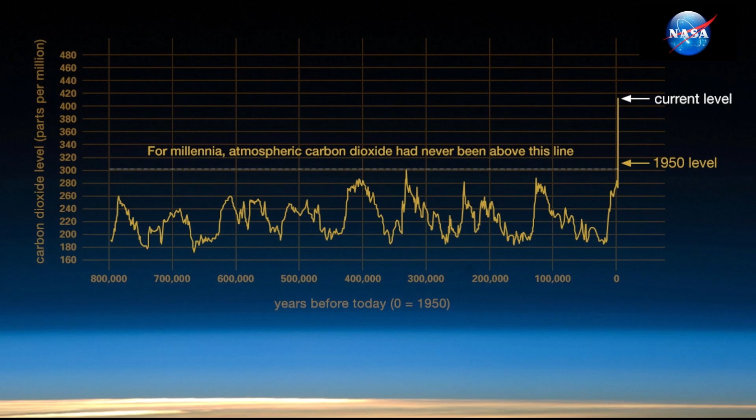So while debates on climate change continue, we saw what happened in the USA in the last weeks. So a lot of debates about climate change, but it is undeniable that CO2 levels in the atmosphere are rising. The oceans are acidifying, the biodiversity is decreasing. So this reality, because this is a reality, these are facts, imposes a responsibility toward future generations, reminding us that it is time to take charge of our energy future. So this is our mindset for the team at Enerprox.

So fossil fuels, although they have contributed to significant advancements, like increasing life expectancy, the gas is not the demon. So as we see, life expectancy, GDP per capita, infant mortality, economic growth, all this was driven by fossil fuel. It was not the demon. It allowed us to arrive where we are now. But if we look at the future, the transition must be done to a sustainable system because this is a finite resource. This is just the basic stuff.

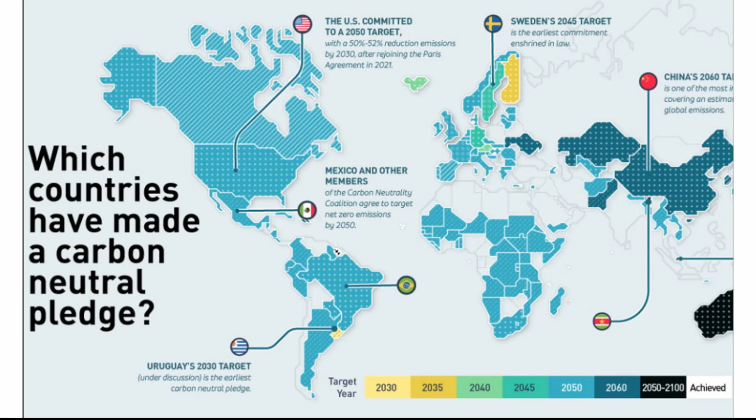One of the major encouragements is that leading nations, as USA and China and others, have set carbon neutrality goals. So not just reduce, but achieve carbon neutral goals for the coming decades. So this is a very big challenge to overcome for the next decades. And Canada too, by the way, before 2050, we aim to be carbon neutral.

So the amount of solar energy available on the Earth is about 10,000 times greater than our current energy needs. We have a lot of energy that hits the surface of the Earth each day. Moreover, renewable energies are becoming increasingly competitive compared to fossil fuels. So this is not only a game of environmental targets. This is more an economically driven transition that we have in front of us.

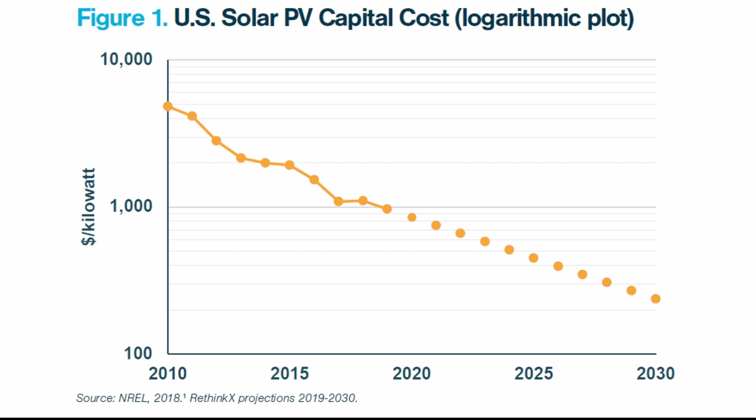So due to the dramatic drop of cost, in the business of solar, we have some key metrics. The cost declined 10 times in past decades. And obviously the main challenge is to have some phasing between the production and the need of the building. So this is intermittency. This is the big challenge to overcome in the solar business. The sun doesn't shine every time we need it and vice versa. So this is a big challenge.

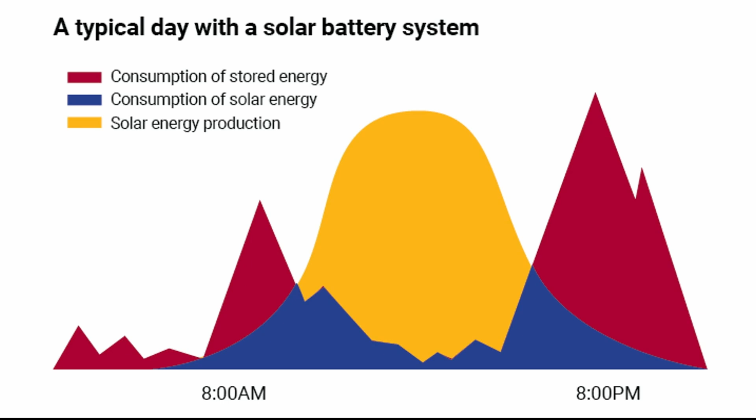But advances in energy storage, particularly with batteries, costs have also declined by a factor of 10. So this is a key metric, factor of 10 for the price. This has become a viable solution. It will become more and more viable to put some big batteries with solar to overcome the challenge of intermittency.

Yeah, so an emerging concept is that the cost of solar will be cheaper and cheaper, and one day we will have the notion of superpower. So we will have a pack of batteries, and we will have a very large solar installation. Sometimes in the day, we will have too much energy because we will over-design the solar part, because it is so cheap that we will put a lot of solar panels. So at some times of the day, we'll have too much energy.

So maybe in the future, depending on the day, we'll have very, very low price energy, even maybe negative price, because we'll have to discharge that energy on the grid. So it will be something that will change the future of energy. In the past, we used to have an upward curve for the price of energy. We bet that in the future, one day, that trend will just go down because the price continues to go down on solar and batteries.

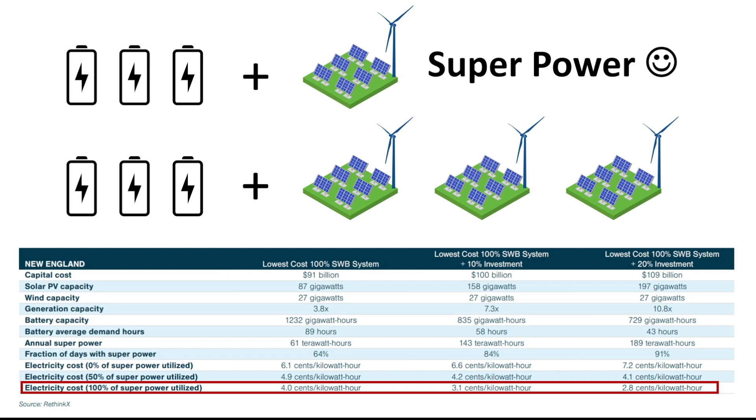So the concept of superpower is very, very important. In Quebec, we are fortunate to have extensive hydroelectric infrastructure. With Hydro-Québec, this is kind of a monopoly, just one business that distributes the hydroelectricity here. So we are fortunate to have 40,000 megawatts of hydroelectricity installed here in Quebec.

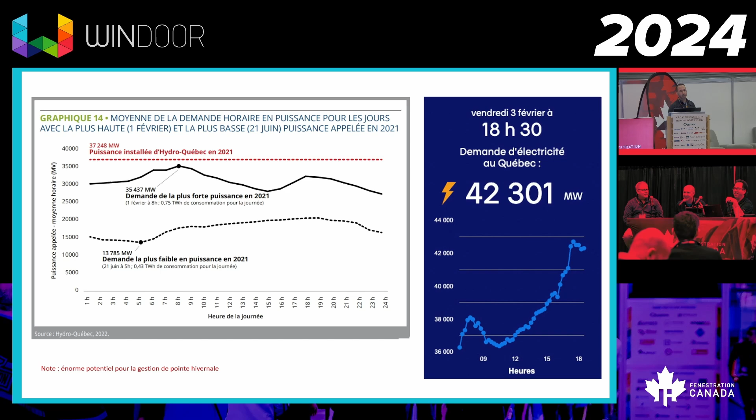And even with all that, we see here a 40,000 peak in February; we got over 40,000. That is a very, very big energy need. So even though we have that kind of power here, hydroelectricity, we still consume about 50% of our energy as fossil fuel. So we will need to transition that gas to electricity.

We need to electrify everything in the future. So we need to think about not just buildings, but also cars, and all the stuff will need to be electric in the future. So this is very big infrastructure that we'll need to build.

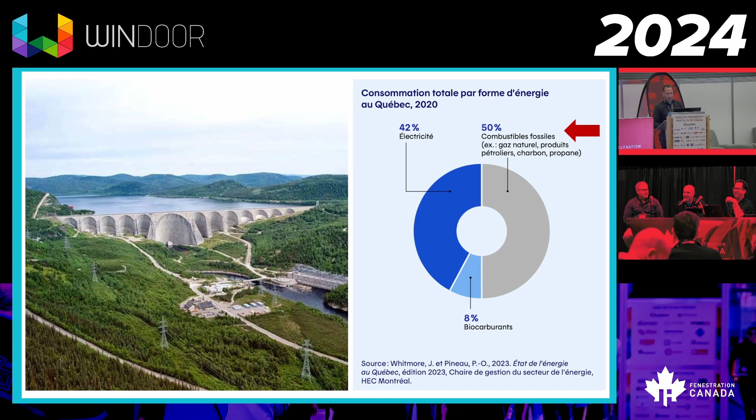So to support the province's decarbonization plan, Hydro-Québec is planning over $185 billion of investment in the electrical infrastructure from here to 2035. This is a very big investment: electrify everything, more energy production, and also energy efficiency. So you guys are in that kind of business. Do energy efficiency. It's important to produce, but also reduce. Both. We need to do both in parallel.

By the way, after 2035, we don't stop there. It will be necessary to double the electricity production again. So after 2035, even though we will have invested that 185 billion, we need to invest more to achieve carbon neutrality. And this is Quebec, but this is the reality in China, the USA, all over the world. It will be very, very expensive to transition, but we need to do it.

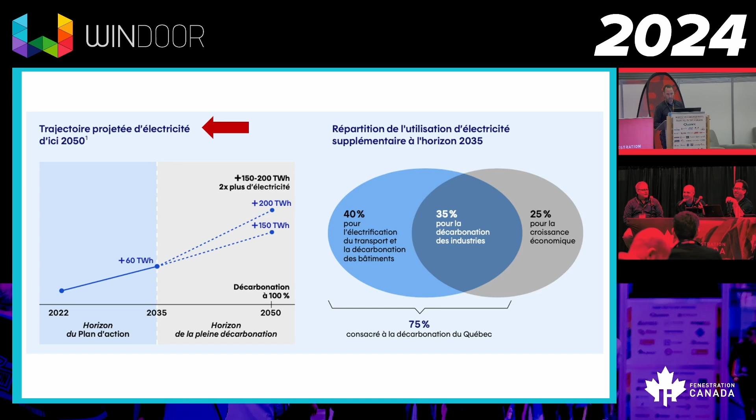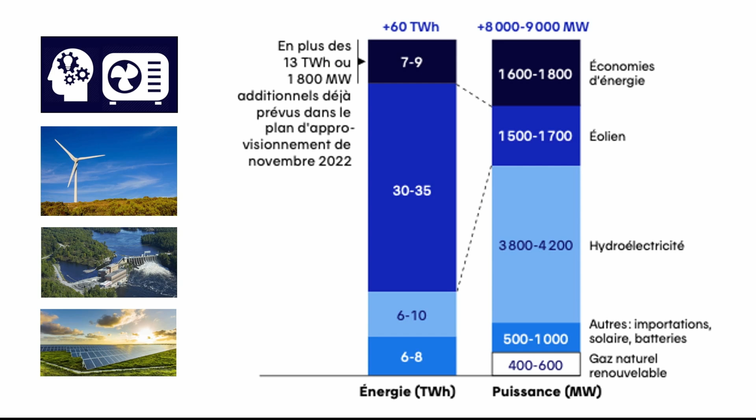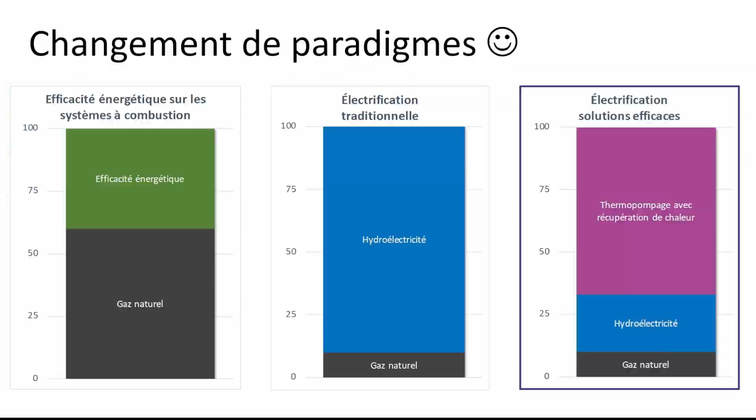Because for the electricity sector infrastructure, what is very hard is to deliver the peak power 100% of the time of the year. It is not economically viable to deliver that kind of peak. So Hydro-Québec did a partnership with Énergir, for the distribution of natural gas. They have a deal that Énergir needs to keep the natural gas going because Hydro-Québec needs the peak shaving a few times during the year. It would be too expensive to do it with hydroelectricity. So this is a kind of paradigm that we need to shift.

So that was just the introduction. I don't know, guys, you are from all over Canada?

Yeah. So an introduction for Quebec is good to have an idea, but it will be the same thing that we will need to do all around Canada, but with different prices and tariffs. I talked to a colleague just before about the differences depending on the province. The energy price is very, very different depending on where we are.

So at Enerprox, we specialize in energy management. First, we have advanced technology software to do it. We integrate algorithms. We integrate heat pumps with heat recovery, solar energy, and also energy storage solutions. Our vision is to transform buildings into decentralized ones. This is another key aspect to focus on. In the past, we installed big infrastructure. In the future, we think it will be more decentralized. So we need to think of each building as a kind of power plant, but decentralized. Microgrids will be usual in the future.

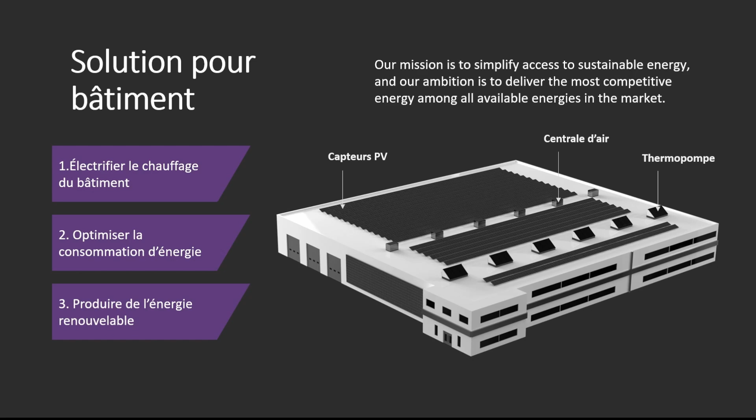So since we do energy efficiency, heat pumps, we will put some solar panels to have more energy. So this is the kind of project that we have. An example of a real project. This is just in front of our siège social, in English, head office, in Victoriaville. So this is about 40,000 square feet.

This is a kind of innovative building with good insulation for the envelope, heat pumps, solar on the facade. So at Enerprox, we appreciate putting solar panels on the facade of the building because we can match the production with the need during the winter. This is very good for us. So this is the kind of building, small building, decentralized power plant that will be installed on the roof.

So our engineers, by the way, use eQuest as an energy modeling software tool. It was originally developed under the auspices of the U.S. Department of Energy. This is a free software, by the way. Any engineer can use that kind of software. This is very precise, empirical data in that kind of software.

So the energy analysis for architects, for energy consultants, but also for manufacturers, we can use that kind of model. And what that kind of model tells us from a data standpoint is that wall, roof, infiltration, and ventilation, yeah, this is very big energy consumption. You see the colors, the big chunk is ventilation, and the other colors are wall, roof, and infiltration.

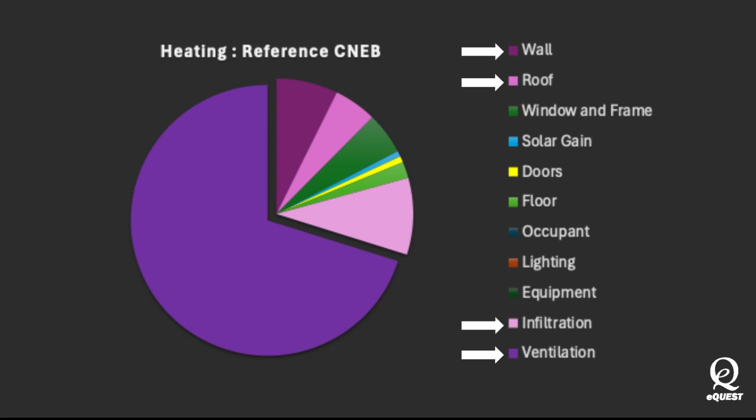So if we work on that kind of energy consumption for the building, for the heating, this is the target that we need to put our focus on. So this is eQuest that will produce that kind of pie chart. And for the cooling, this is also true. We'll consume much less energy in cooling, but we need to address the cooling also. With windows and stuff like that, you have all good products to avoid the sun overheating the building. So we need to have it in mind. But the chunk, wall, roof, infiltration, ventilation, is the main target that we need to address.

That kind of model, by the way, we can do iterations. So when we do a project, we can do 10, 15, 20 iterations, and we can compare with insulation, more heat pumps, less heat pumps, change window, change the wall, the floor. So we can work with architects to bring some data, some science to say, okay, if you change that kind of material, what will be the impact on the energy bill, the durability and stuff like that. This is very, very useful as a tool.

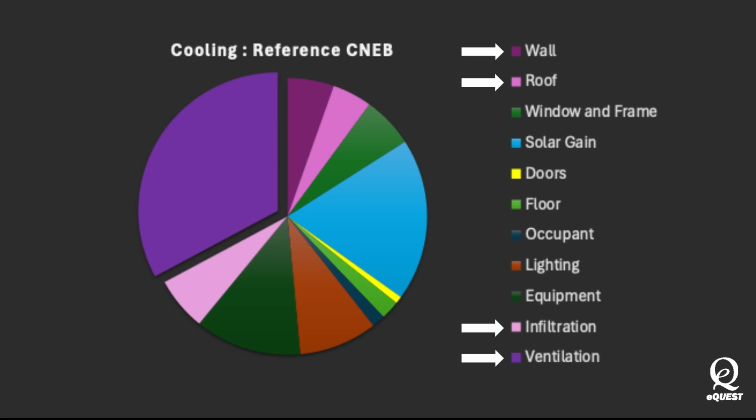So for the heat pumps, Terry, you named it. So we talked about the heat pumps. By the way, one thing that, I will say it in a very authentic way: the kind of scam that we see in the market, because we have subsidies sometimes. The price of the heat pumps and maybe other products will be very high compared to without subsidies. So this is a big challenge to overcome too. This is the kind of business that will drive the cost higher if we have subsidies.

At Enerprox, same price before or after subsidies. What we want is volume. We don't want the niche market. We need to have a very mass market. If we want to do mass market, we need to have a good payback and very low cost. So this is a mentality of transparency and honesty that we need to bring to the market. So it is very important for us to have a very, very low cost of a project.

So our heat pumps are the key tool for us. We saw ventilation, so we will do the heat recovery on the ventilation. We have developed modular solutions, all aluminum based, so this is very light, durable. We integrate air-to-water heat pumps along with mechanical, electrical, and electromechanical components. So this is a skid, a plug-and-play skid. And we use glycol with water to do the distribution of the cooling and the heating.

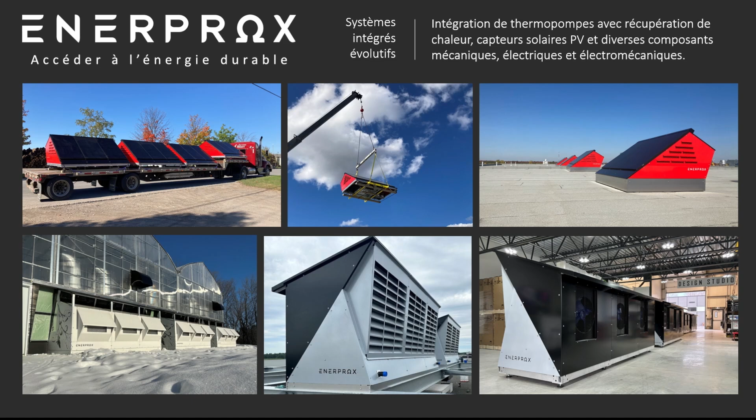This is just the kind of setup around the heat pumps that would change, but it's every time the same technology under the hood. So these modules are designed for simple and rapid deployment. We need to industrialize, so this is very important for us, industrialize to scale up that kind of deployment to do the energy transition. And by the way, the era of prototyping for each building is over.

I don't know about your business, but in our business, in the last decades, there was a lot of prototyping for each building and new project, new design, new engineering. We need to put that aside and rush to the cut and paste solution. If we want to scale up, we cannot do a prototype at each project with a different system each time. We need to cut and paste and build on the same technological platform.

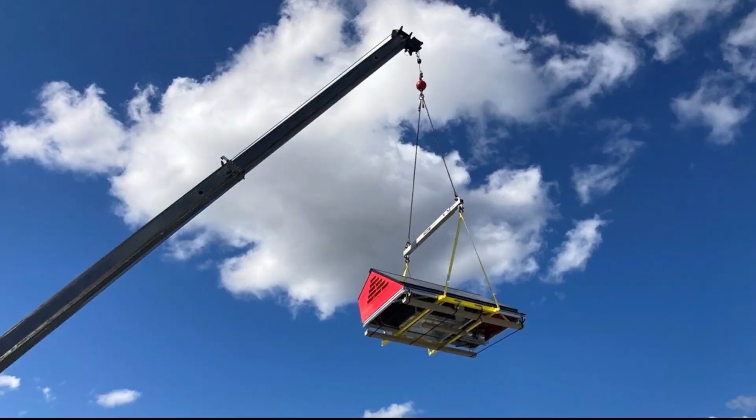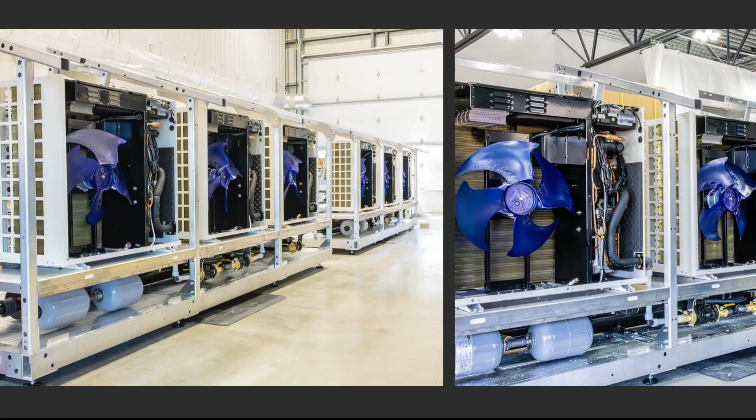So we embedded control components. This is very, very important. We build the instrumentation and control inside the cabinet, and we do the programming. So we will do over-the-air software updates. So this is also the same mechanic, with instrumentation and control components that will do the automation to have the optimization in real time.

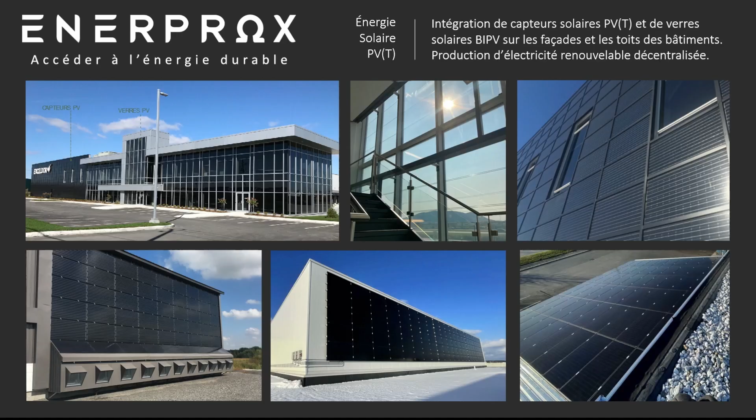Meanwhile, our second key, because for us this is a key tool, is solar energy. So we need to think about the fact that approximately 1,000 watts heat the earth per square meter, and we will transform about 20% of that into electricity. So this is the kind of project that we do. Obviously, we do not manufacture the solar panels.

I heard some stuff about China just before the conference. China is very, very dominant in that domain. Maybe 90% of the solar panels are manufactured in China. The other 10%, they purchase some stuff in China and they do the assembly elsewhere. No, I joke a little bit, but China is very, very dominant in that domain. Not only on cost, but also from an engineering standpoint.

In the past, it was made in China, but now it's not just made in China with low cost, it's engineered in China. People in China have very big R&D teams, and they are very dominant at scaling up and accelerating production, bringing the cost down and the efficiency higher.

So yeah, this is the kind of project, and we did both building integrated PV and PV in superposition of the building envelope. These are two very different products. Building integrated PV, so BIPV: the PV needs to have all the certifications for building material. The other, building applied PV, is just PV applied in superposition of a traditional building envelope.

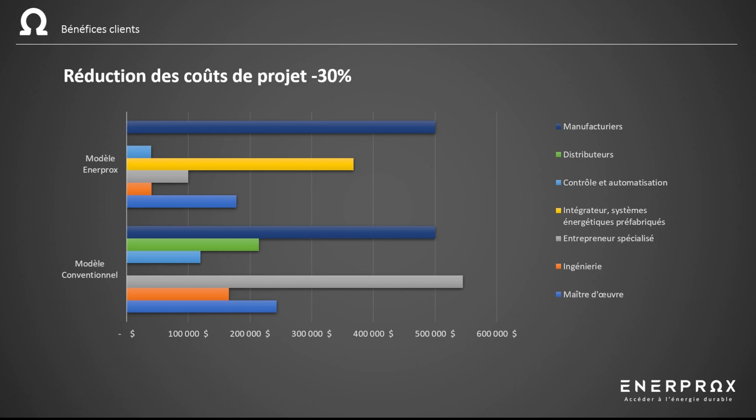The modular solutions also shorten the project cycles, obviously. At Enerprox, the metric is that we shorten the cycle of the project execution by a factor of 3. This is very important in the mechanical buildings business. The life of the project is very long, about 12 to 18 months. So we shrink that to 6 months by doing it modular.

So this is a big metric for us, because if we do volume, we need to think about the projects we build the same way as in a factory. When we produce windows, we want high volume and no shutdown, and we want to keep the factory going and going. We need to have the same mentality when we're on a construction site. We need to industrialize the project. So this is our thinking. So far, so good.

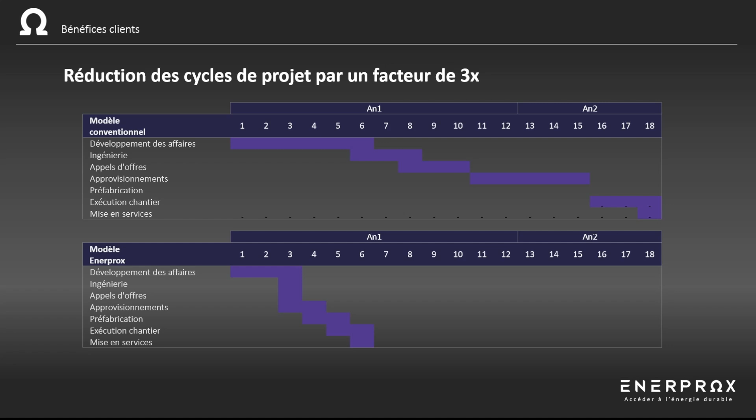So in conclusion, just to have something to bring back in mind: for sustainable energy, this is not just about reducing greenhouse gas emissions. This is not just ecological. This is about reducing energy bills and increasing property value, big numbers. From a property value perspective, when we put energy efficiency, heat pumps, solar in the building, it increases in value significantly. Also, cooling the spaces during summer will be more and more important because of heat waves.

And more on the side of the factory, because now we'll have workers shutting down the factory when it's too hot. We saw here in Quebec last summer, it was a challenge for factories to keep going during the heat wave. So we need to cool. It will maybe be as important in the future as heating during winter, to keep people in good health inside the building. So improve ventilation and quality of air. We need to bring value, not just on the energy bill or on the greenhouse gas emission.

The energy transition will happen when sustainable energy is more competitive on all aspects compared to fossil fuel. This is what we think. So thank you. Any questions for Christian? That's good, yeah.

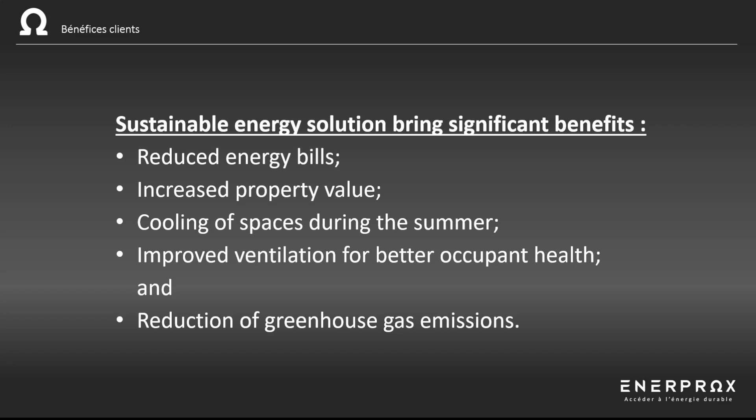And the sweet spot is about 50,000, or 25,000 is good. So if we want a good payback, we need to have big air volume without too many spaces and complications to deliver energy. So a room like this here is a very good target because it's simple. You put it on the roof, the distribution is very simple, so we can do it very cost efficiently. Thank you. Yep.

That's good. Thank you. Thank you.